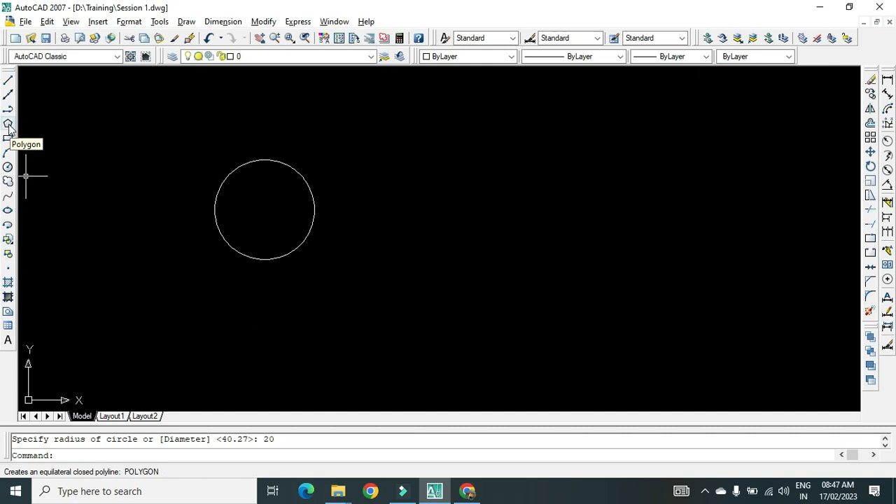Okay, let us take this example. First click on polygon. Now, as the name suggests, polygon may have n number of sides, but the length of each side will be the same. Let us take one example. We have to draw the pentagon. You know that pentagon has 5 sides. So first, enter the number of sides. I will just type 5 and press enter.

Now the next instruction is to specify the center of polygon. Here it is not visible, so it is very difficult to point the center. How to make it easy? Just move your cursor on the edge of the circle, and the center will appear. Click on center. Next is whether you require the polygon inscribed in circle or circumscribed about circle.

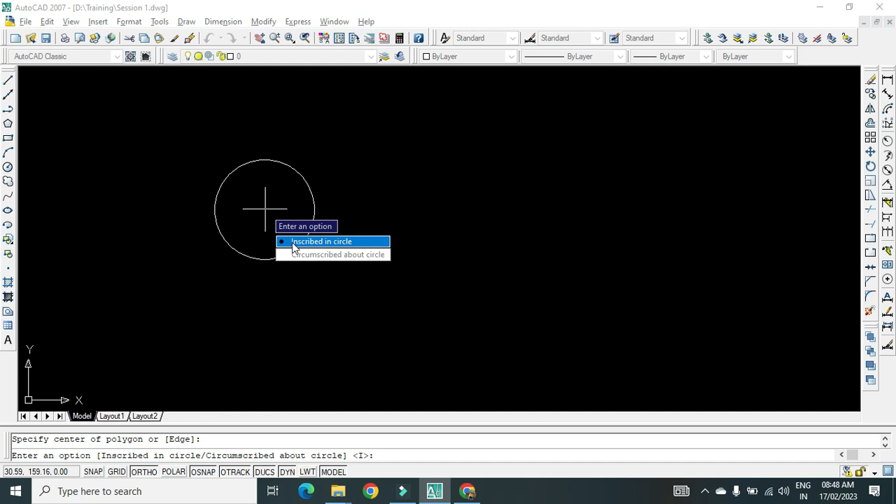As I said, inscribed means inside, circumscribed means outside. Let us take the first example as inscribed, so I will click on inscribed. Now, what is the radius of the circle? It is 20 mm, so I will just type 20 and press enter. You will get this polygon inscribed in the circle.

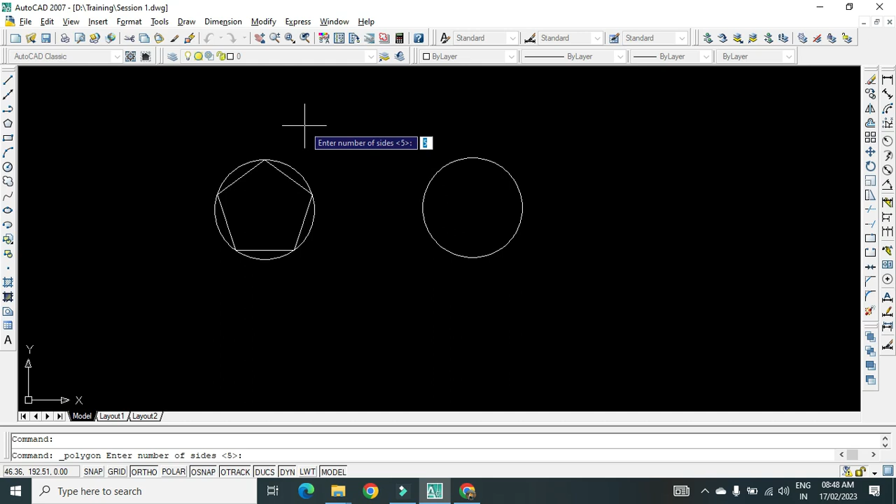We'll repeat this with circumscribed. Let us say there is a circle with 20 mm radius, and we execute the polygon instruction. I will click on polygon. In this case also we require 5 number of sides, that means pentagon. So I will enter 5, press enter, specify the center. Again, center is not visible, so just move your cursor on edge, it will get visible. Click on center.

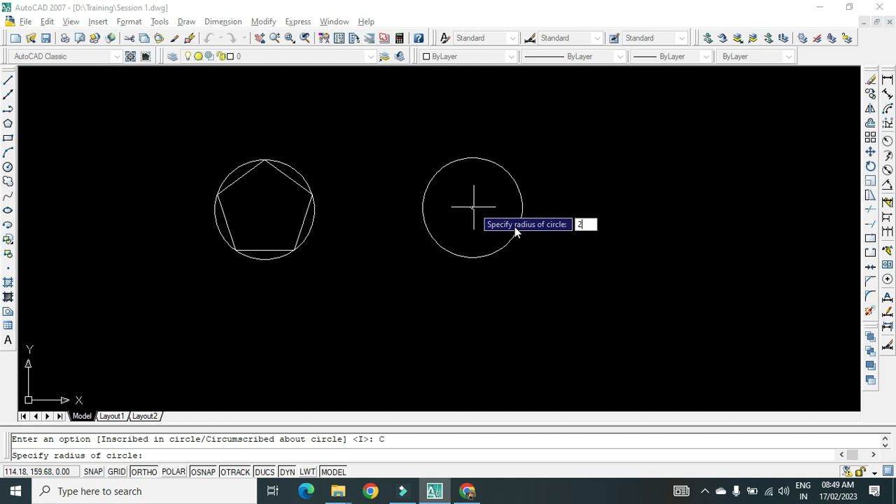In this case we require circumscribed, so I will just click on circumscribed and mention the radius as 20 mm, and click enter. You will get the polygon as circumscribed around the circle. So this is nothing but the polygon.

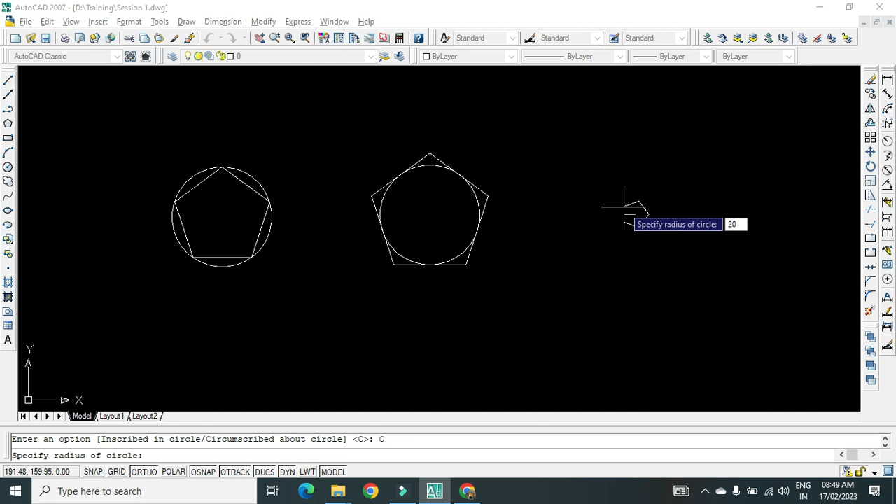It is not necessary to draw the circle. You can directly go with polygon. Mention number of sides as 5. Again, specify center, it may be anywhere, and choose the option. Then mention the radius, so you can draw it. In this way you can execute the polygon. You may draw a hexagon or polygon with any number of sides.

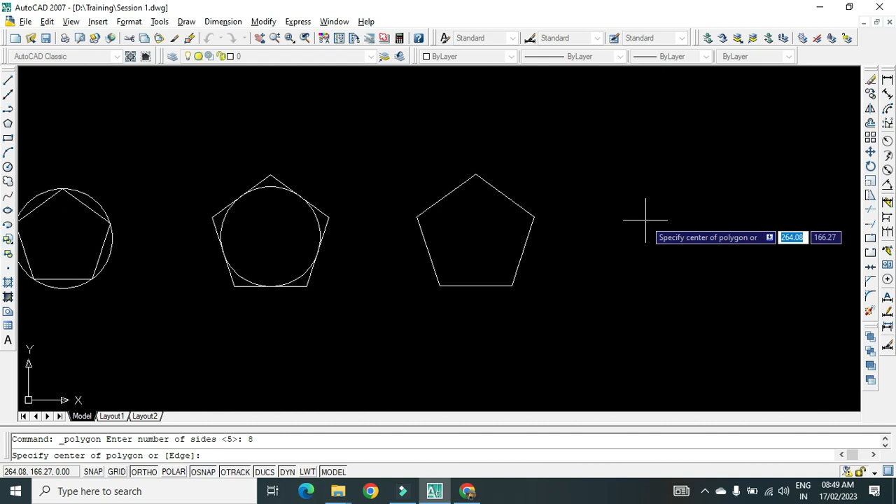Let us say we'll draw the octagon, so number of sides are 8. Press enter, this will be the center. Let us say we are going to draw it circumscribed and mention the radius as 20. In this way you can execute the polygon command. See, what is the application of this?

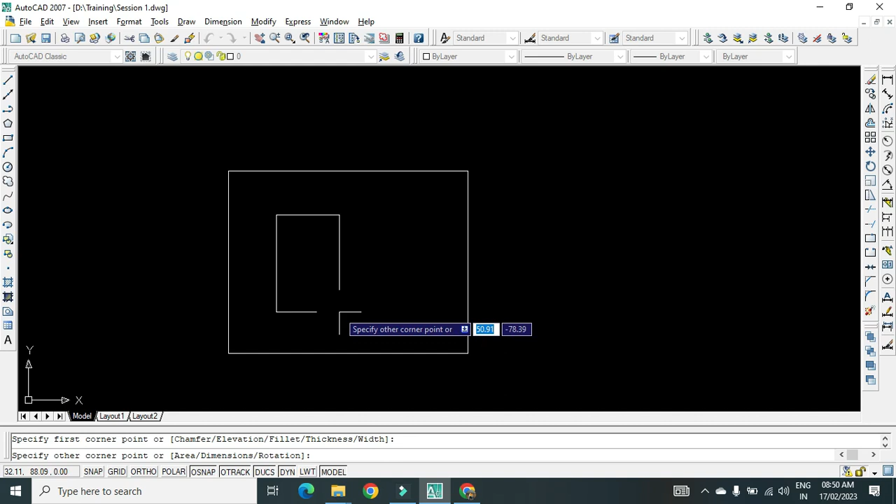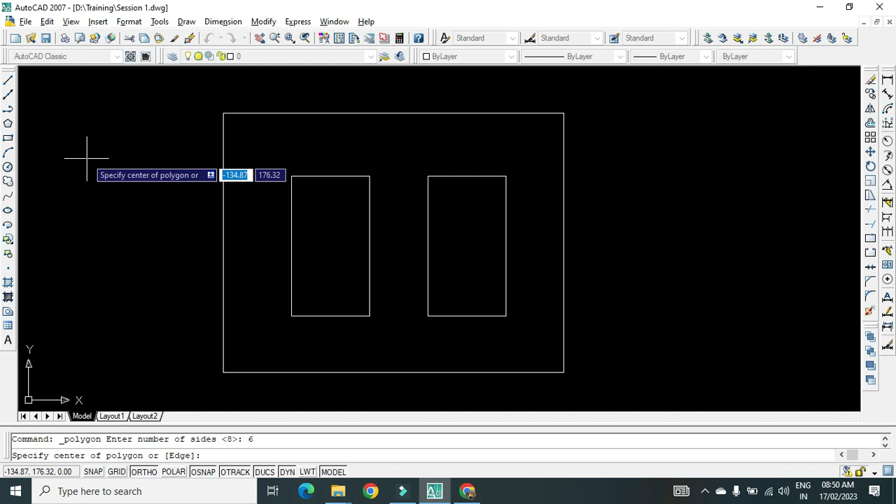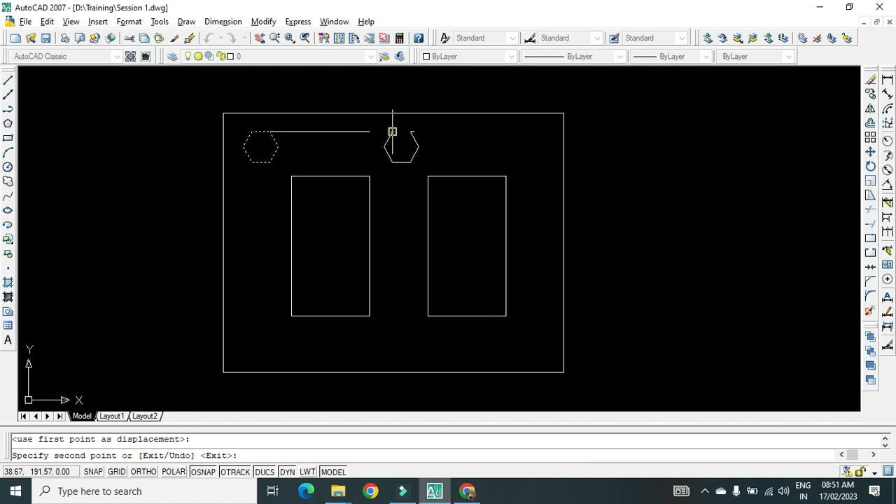Suppose you are going to draw the diagram for a transformer. Let us say this is a transformer, this is just the side view. This transformer has a nut and bolt arrangement. At this location there is one nut bolt, here there is one nut bolt, here there is one nut bolt. This nut bolt can be drawn with polygon. So I will just draw one nut, meaning the top view of that nut bolt. Let us say this one has 6 sides, and it should be inscribed or circumscribed, and accordingly you can have it here like this. So the application of this polygon, in our case, we can draw a nut bolt arrangement.

We'll see in a further example. After that, rectangle. But before going for rectangle, you should know about drawing the rectangle in first quadrant, second quadrant, third quadrant, and fourth quadrant. So let us take one example.

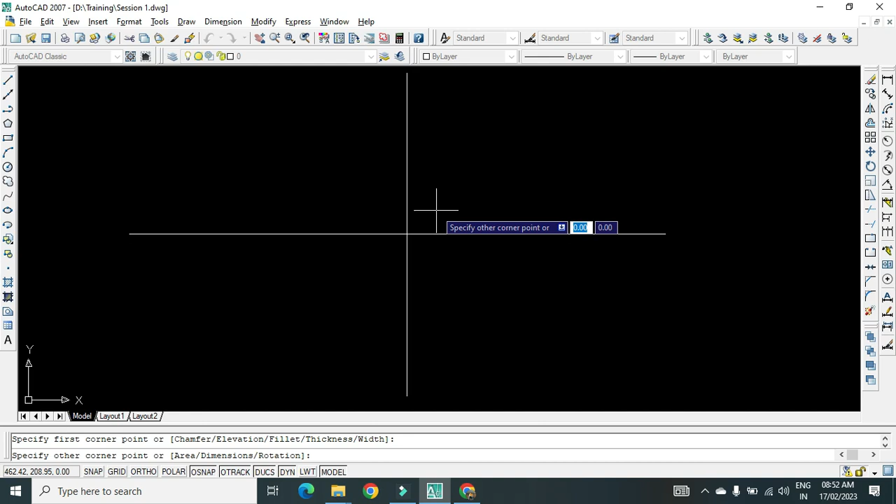So let us say I have to draw the rectangle in first quadrant. This is how to execute rectangle. Let us say I am going to take the rectangle, and the first instruction is to specify the first point. Let us say this is the point, that is the first point. In case of rectangle, we have to give the length and width of the rectangle. So in this way we can draw the rectangle. Right now we are drawing the rectangle in first quadrant, that's why here both the dimensions are positive.

See, if I move in this way, its x dimension, that is length, is changing, and if I move the cursor in the other direction, its y dimension is changing. So whatever the dimensions over here, the first one is along x-axis, and the second one will be along y-axis. Let us say in this case I have to draw the rectangle of length 30 mm and width of 15 mm. So I will just type 30, it will get displayed.

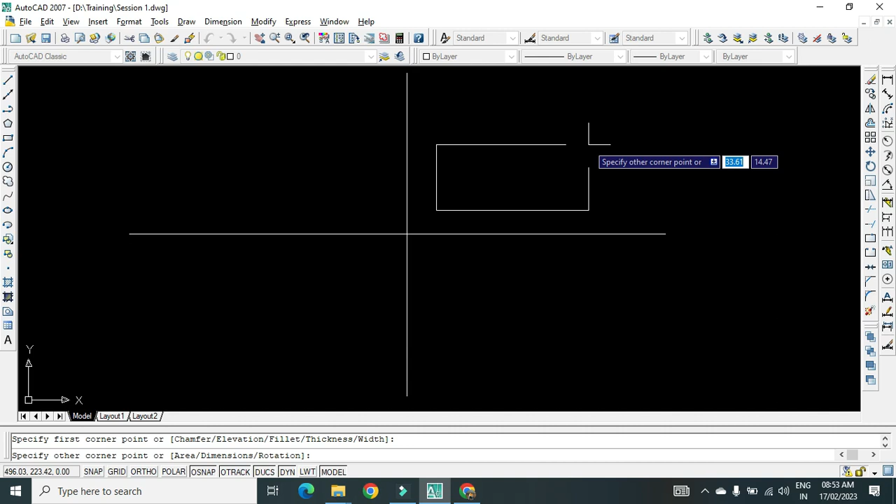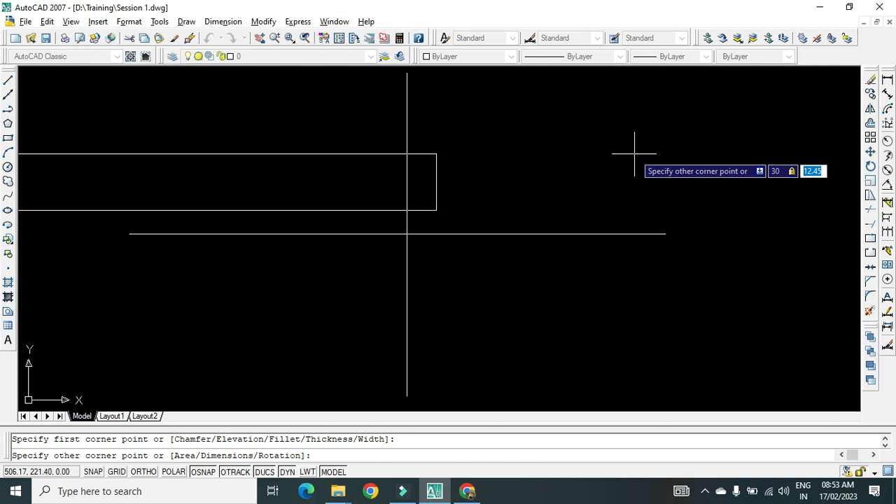Now, how to change the dimension, how to enter the width? Press the tab button on your keyboard. It will get shifted to y coordinates. So see here, once you enter tab, the x dimension is locked. Now I have to change the second one, so I will enter 15 and press enter.

You will get the rectangle with dimension 30 by 15. So in this case, we have drawn the rectangle in the first quadrant.

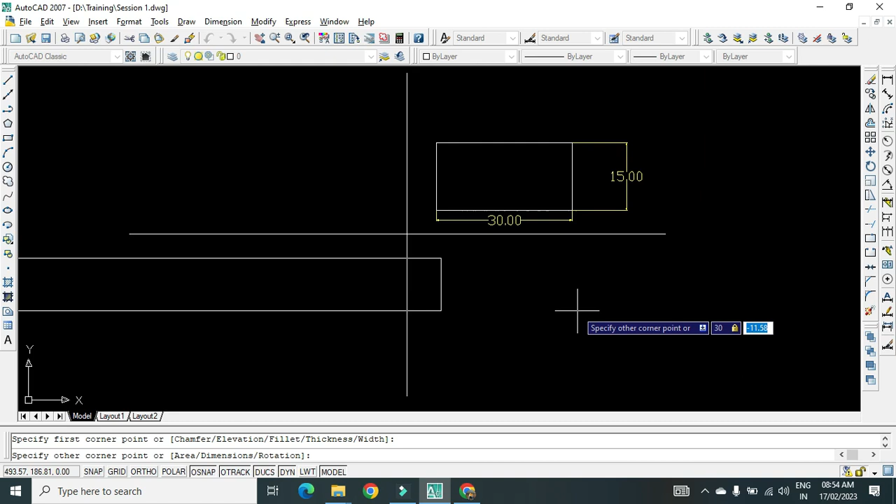Let us say I have to draw the rectangle in the fourth quadrant. So I will just take rectangle and mention the first coordinate. Here you may observe that x coordinate is positive and y is negative. So while entering this, I will type 30 as x coordinate, that is the length of rectangle, press tab, and while entering the y coordinate, or width of the rectangle, I will enter minus 15. So it will appear in the fourth quadrant.

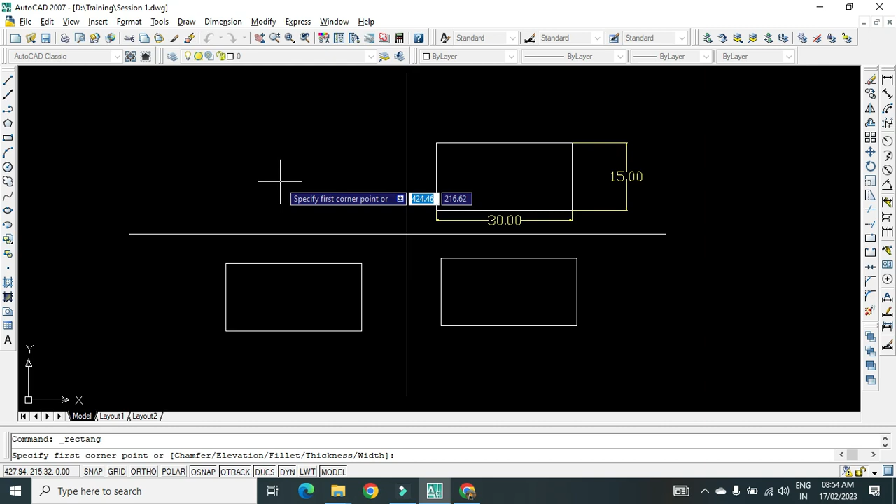Similarly, in the third quadrant, it will be minus 30, tab, minus 15, so I will get it in the third quadrant. And in the second quadrant, I have to draw it this way, so its x coordinate will be negative and y coordinate will be positive.

Why am I telling this? Suppose this is the first point. If I have to draw the rectangle in this direction, both dimensions, length and width, should be positive. If I draw it in this direction, it will enter the fourth quadrant, so x coordinate will be positive and y coordinate negative. If I draw in this direction, both coordinates should be negative. And if I draw it this way, x coordinate will be negative and y coordinate will be positive.

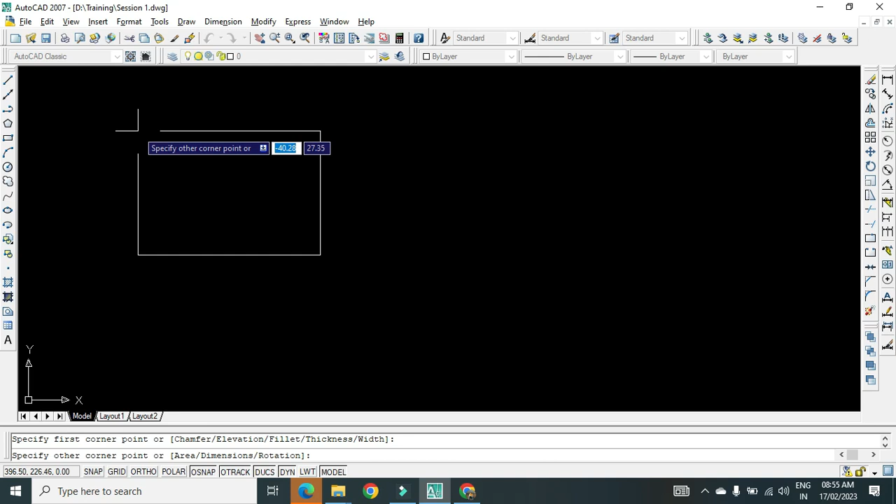So I hope you understood how to draw the rectangle. First take rectangle, specify the first point, and mention the dimensions, that is 30, tab, and 15.

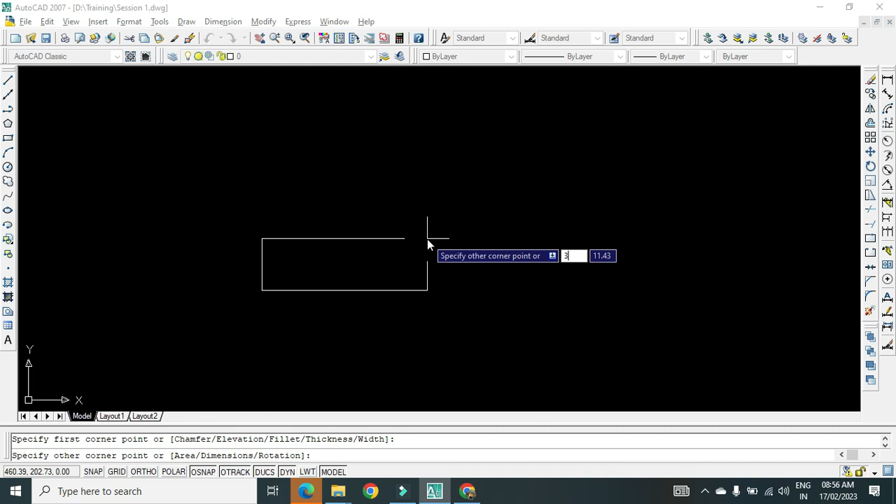I will repeat again: 30, press tab, and 15, press enter.

What is the shortcut for rectangle? Instead of going here every time, you just type REC and press enter, and the rectangle will get executed.

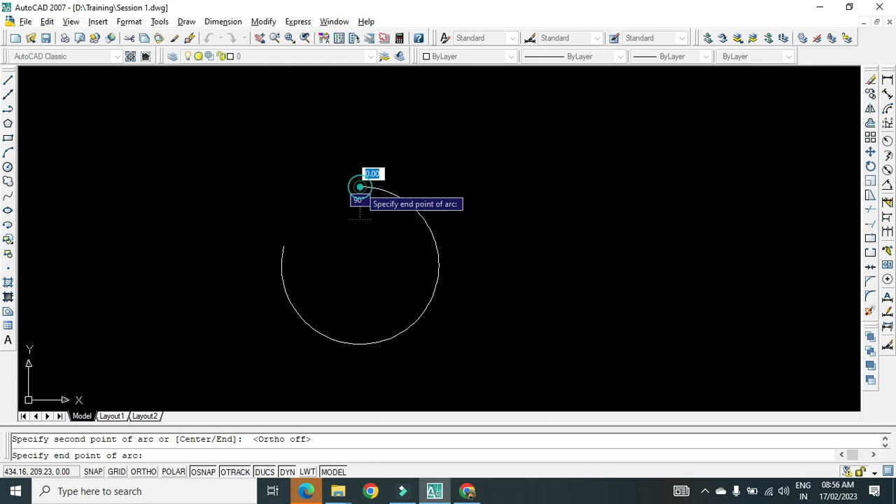Now the next one is arc. Click on arc. There are different types of arc. In this version, we can draw arc with 3 points: mention the first point, then the second point, and then the third point, and you can draw the arc. This is called a 3-point arc.

But in recent versions, you may draw the arc with radius, arc with 2 points, or arc with 3 points. So I will again repeat: specify the first point, specify the second point, and specify the third point, and you can draw the arc.

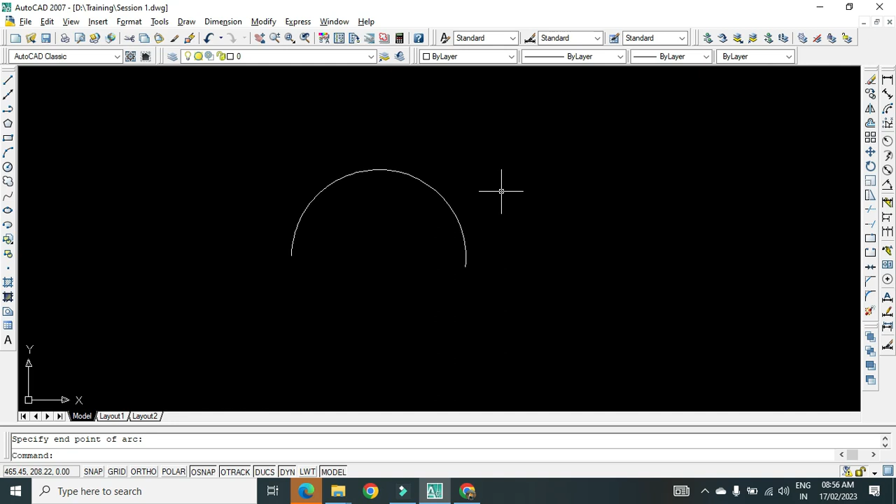What is the shortcut for arc? Arc starts with letter A. So I will just type A, enter, and I can execute the arc instruction.

Then the next one is circle. Click here, circle. First step, specify the center of circle, so I will click here. Now specify the radius of circle. I will move the cursor towards this side, and suppose I have to draw the circle with radius 20 mm, so I will type 20 and press enter. You will get the circle with radius 20 mm.

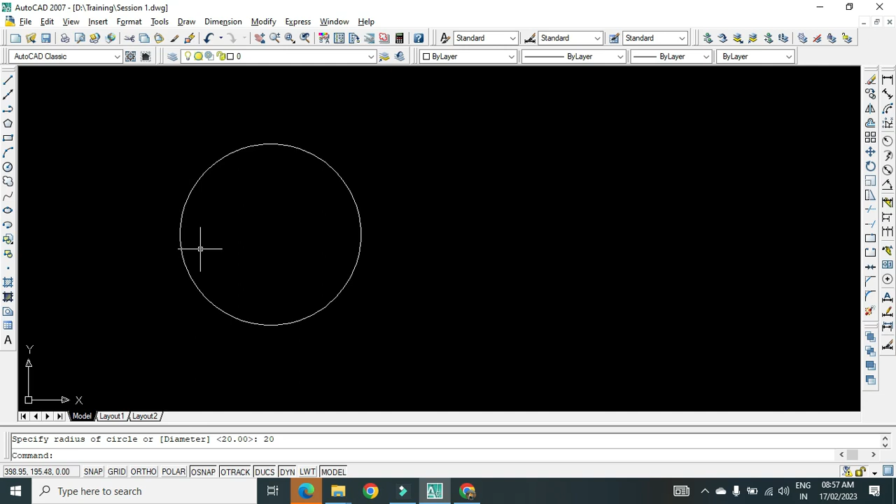The same circle can be drawn with diameter. Just click on circle, specify the center. Now I have to mention the diameter, but right now it is asking for radius, so press D, enter, because diameter starts with D, and then type the diameter of circle as 40. You will get the circle with diameter 40 mm.

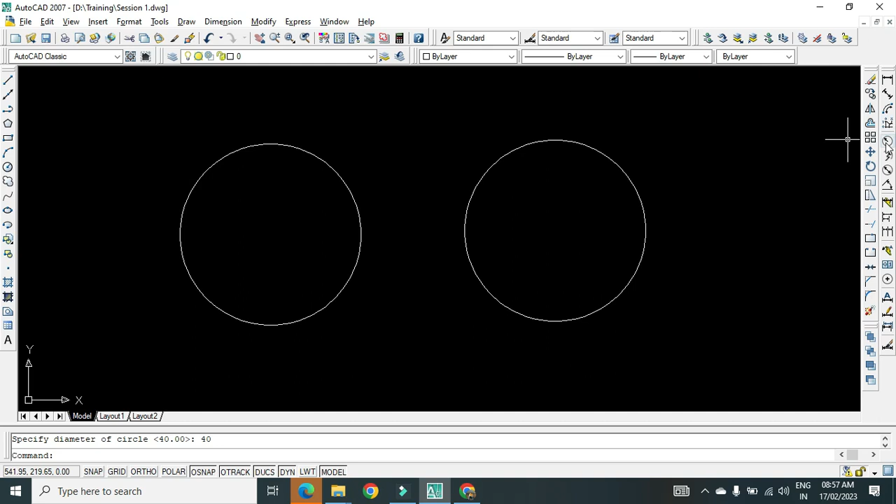How to check the dimension? In this tab, this dimension is used for radius. Click here, radius, click on edge and drag here. Similarly, suppose I want to display the diameter, take this instruction, diameter, click on the edge of the circle and drag here. Similarly, click on the edge, drag here.

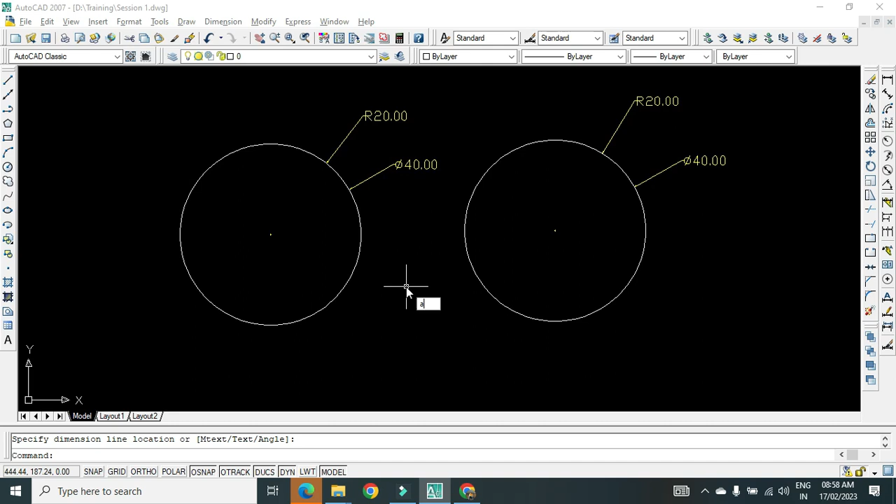So in this way you can draw the circle. Now what is the shortcut for circle? Circle starts with C, so just press C, enter, specify the center point, specify the radius, and press enter. In this way you can execute the circle command.

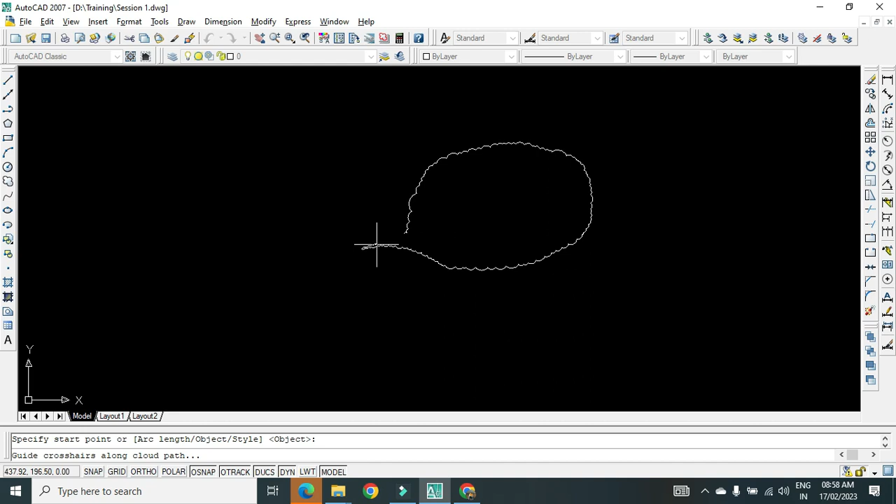Now the next one is revision cloud. Generally, whenever we are giving a drawing to our senior or client, if there are some changes, those can be drawn in revision, meaning written in revision cloud. So by using revision cloud, you may write down the comments by drawing it.

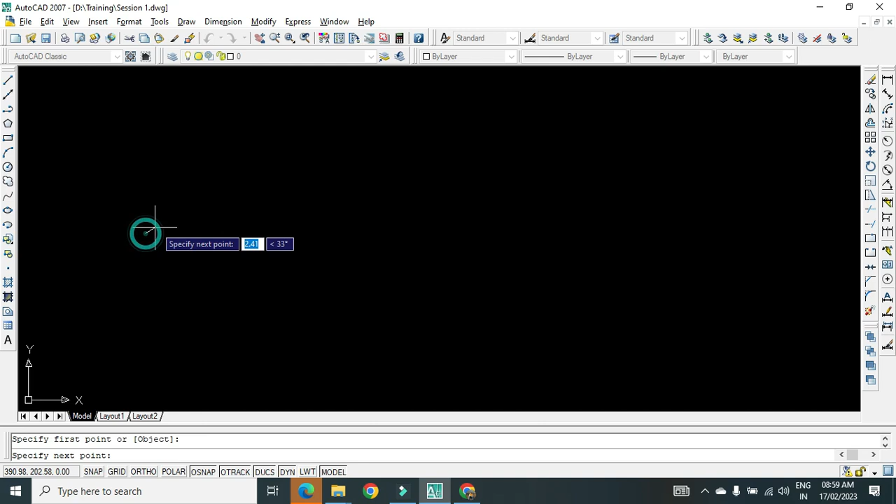After that, spline. What is the application of spline? Spline is nothing but a line with a number of points. Suppose I have selected the spline, this is the first point, so I can provide a number of points, and accordingly give the path to this spline.

Now, how to terminate this spline? To terminate it, you have to press enter or space bar three times: first, second, and third. Then it will get executed.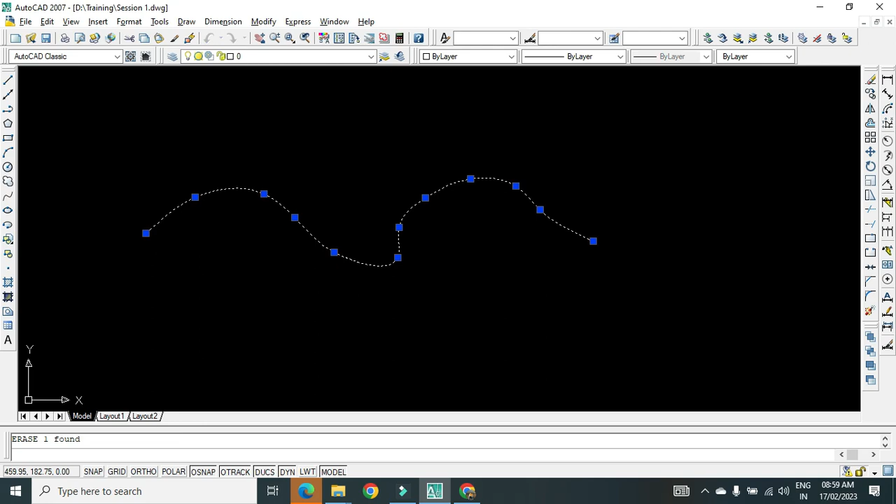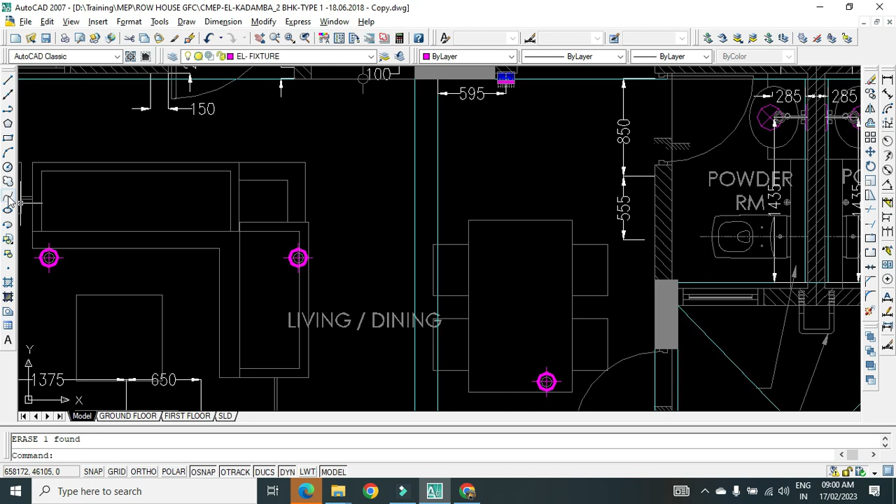What is the application of this spline? Let us take one example. There is a drawing of a 2 BHK or 3 BHK flat, in which we are going to give some points. Let us say these are the light points, and our switchboard is here, so we have to show the connection diagram. So I will take the spline, let us say this is the spline, and by using this spline, likewise I can give the connections.